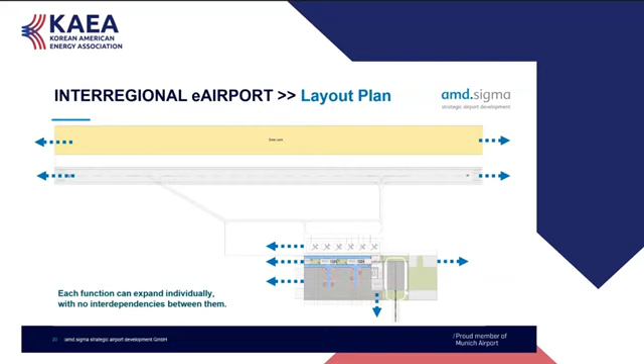And that's how it looks. You have a big solar park, a runway of about 1,000 meters, and on the bottom you see a terminal building that combines a vertiport and an airport. That's the first one that has ever been designed this way worldwide, so we're quite proud of it.

To the right, you have either an airport city or a cargo city, because we believe you can have passengers during the day and cargo during the night, and you get a much better business plan with that.

So that's pretty much how it could look, that's basically quite a lot. But you can start small. You can start with half of the terminal building for passengers, and also start with only very little for cargo, and just go piece by piece and let it grow.

So we have about 12 eVTOLs that feed the passengers from the big city into this airport, and we have 6 positions for electric planes that can be 9-seaters, 25-seaters, up to 40 seaters. That can host anything between 300,000 and 1 million passengers.

So for the last slides, there are a few impressions from the inside. Maybe next slide.

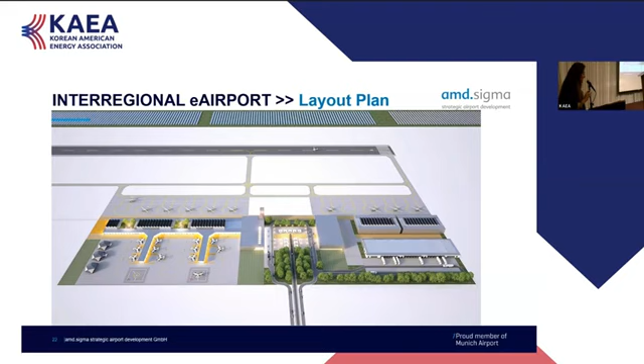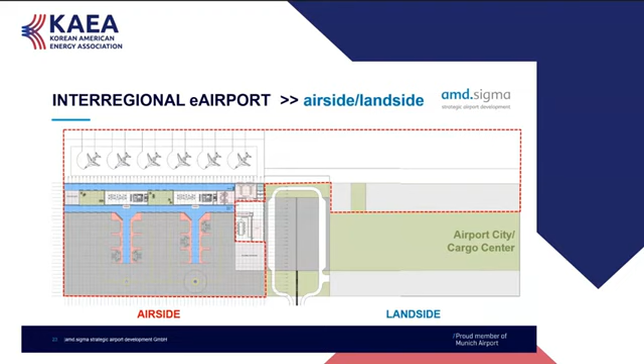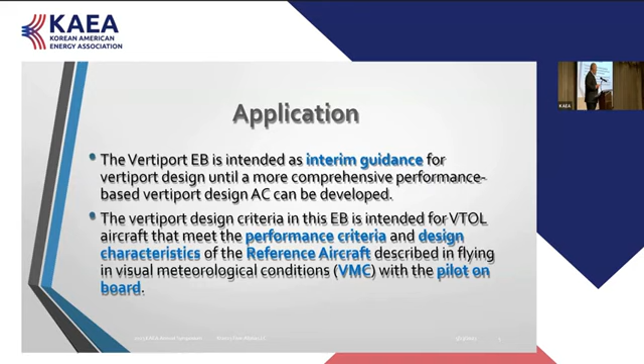Now, the FAA has said they're probably going to release an update to the engineering brief, maybe even this year, before the AC is published, because there are some things they didn't address that they want to.

Next slide, please. Now if we go into public versus private, this is one of the challenges in the United States. In the United States, we only have two categories for use case: public or private.

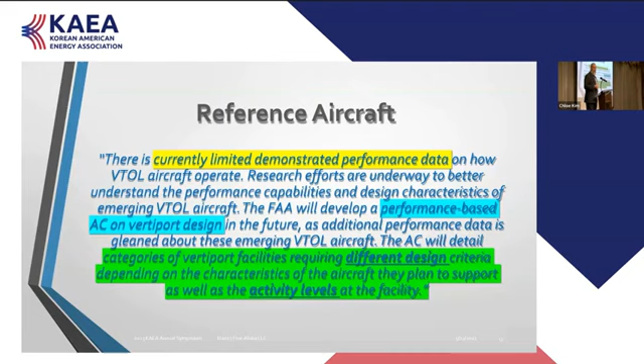Next slide, please. So these are just some of the things on the reference aircraft. You'll notice electric battery driven, using distributed electric propulsion, is the criteria: 12,500 pounds, maximum length and width 50 feet. Anything greater than this would not fall into this category of the reference aircraft—it would be something other than. Next slide.

Land-based, so we're not looking at anything that's off water, water-based, amphibious, or float operations in this current engineering brief. VFR pilot on board.

If you don't know what hover out of ground effect means, it's a performance classification for helicopters in the certification requirements under Part 27 and Part 29. When an aircraft, helicopter, or eVTOL is in close proximity to the ground, the airflow gets resistance, and as that resistance pushes back, it requires less performance from the aircraft to hover. Once the aircraft leaves that area, it gets into what we call out of ground effect. Rule of thumb for helicopters is 1.5 times rotor diameter, and you're into a higher performance requiring area for flight.

So that's one of the things we pointed to in the eVTOL: if you're landing with out of ground effect normal operations, it must be able to have that performance level. It's quantified as being able to take off vertically and land vertically. And then the downwash, outwash is something we're looking to measure because we're not sure what that is yet.

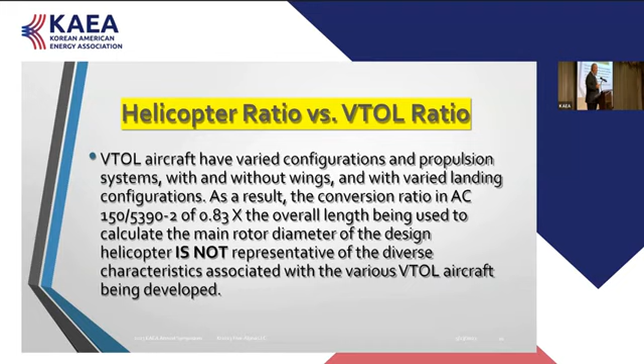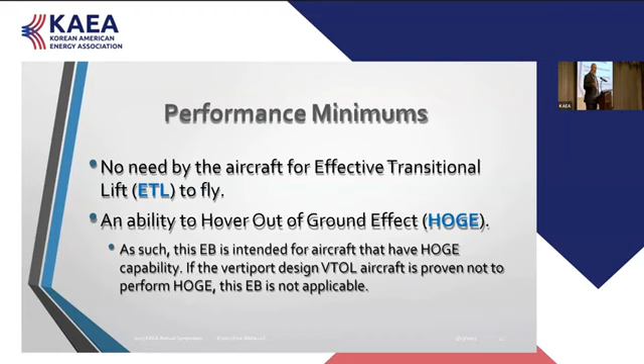Performance minimums, effective transitional lift, and hover out of ground effect are the two primaries they point to. This is a new acronym: controlling dimension. It basically equates to what we refer to in ICAO as D, or overall length. So this is now the new D. We used rotor diameter a lot in the past, but now it's controlling dimension.

Design and geometry. This is straight out of the book. This is a size that we're looking at today.

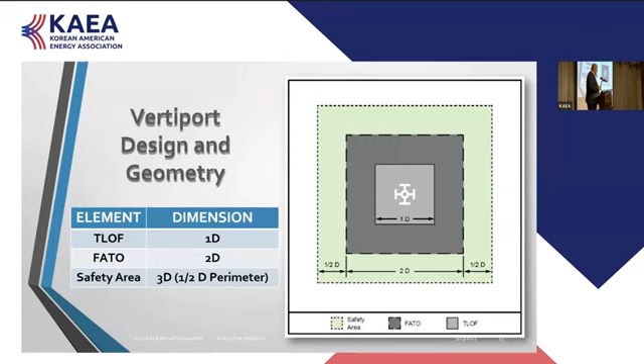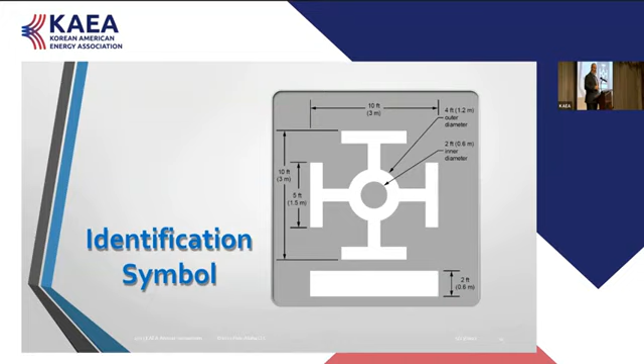This is the original identification from the 1990s for heliports. There's testing going on right now at the FAA Tech Center to identify if this is the right symbol for vertiports.

We talk about conversion, redesigning. That's a criteria in the engineering brief that speaks to that. Again, it's challenging to do that.

Charging electricity. One of the groups that wrote the section in the FAA engineering brief that I'd pay very close attention to, if you're not familiar with it, is called NREL, National Renewable Energy Laboratories. They're a government agency out of Denver, and they do a lot of work in the renewable energy world and have written some of the better white papers in this space for charging.

One of the things at airports, or even heliports, is what's the separation between aircraft. This is where we get into wake turbulence separation between lights and heavies. We don't know exactly yet what the eVTOLs will produce for wake turbulence.

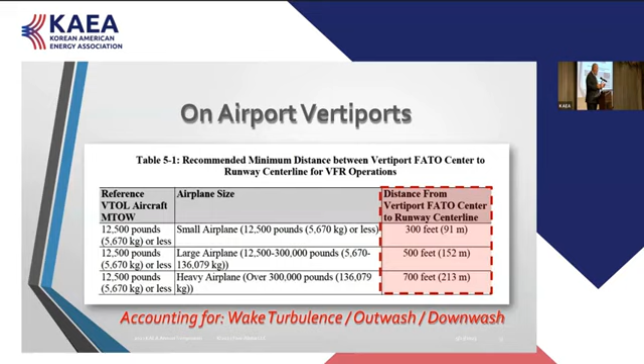Benefits of existing airports: existing clear airspace, access to the electrical grid, room to grow and expand, capacity for high throughput mass transit access points. Your average heliport doesn't have that.

Downwash, outwash - we're doing research on that right now. Working with Wolpert, we're getting ready to kick that off pretty soon.

Other standards: ASTM International has a Vertiport standard, published August 2022.

National Fire Protection Association - I'm the chair of NFPA 418, which is a heliport, now heliport-vertiport standard. We just finished our last go-around. Expect that to be published as early as December 2023, but as late as June 2024. That'll give fire standards for municipalities.

International Code Council - haven't seen anything from this group yet. They're the ones that design building code and fire code. We need to engage this group because municipalities lean on this for heliports, and will lean on it for vertiports.

New group out there I've worked with for the last couple of years, designing a standard for illumination: IES. This is not the landing area - this is the surrounding area, the parking area, the refueling area, the loading area for cargo and things like that. But the IES, it's an ANSI standard.

So we heard a lot today from our first two speakers about the need for data in order to inform standards, some harmonization of those standards internationally. We heard a little bit about opportunities and challenges of existing and new infrastructure, a complex governance landscape, and the need for that methodical planning process to get AAM off the ground.

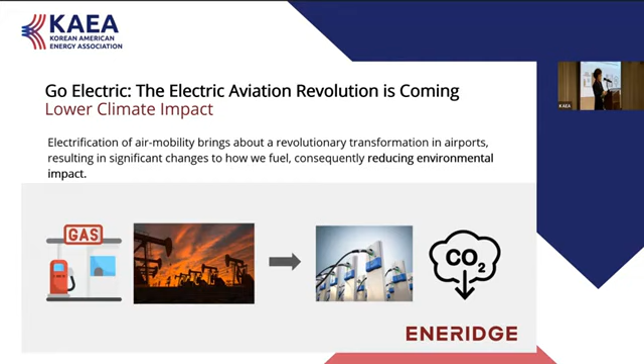When we electrify air mobility, charging infrastructure needs high power solutions. High power charging systems will enable quicker charging, reduce turnaround times, minimize ground time between flights, extend flight range, increase flight frequency, and improve overall operational efficiency.

So aviation charging has specific requirements. For ground vehicles, when you drive an electric vehicle, you can drive up close to the charger and start charging. But for aircraft, you cannot drive up to the charging station. Aircraft will land on a certain spot, and the charger should reach out to the aircraft with a moving wheel or extended cord. So movable chargers and extended cables should be introduced to aircraft charging.

But high power charging cables are too heavy to handle, so the thickness and weight is a hurdle, an obstacle to be taken care of.

When a ground vehicle drives up to a charging station, stops or bollards will block the vehicle in front of the station for safety measures. But in aviation charging, because of the aircraft's wingspan and rotor diameter, a low height charging station would be better to prevent any possible incident. So lower height chargers have a spatial advantage and reduce vertiport complexity.

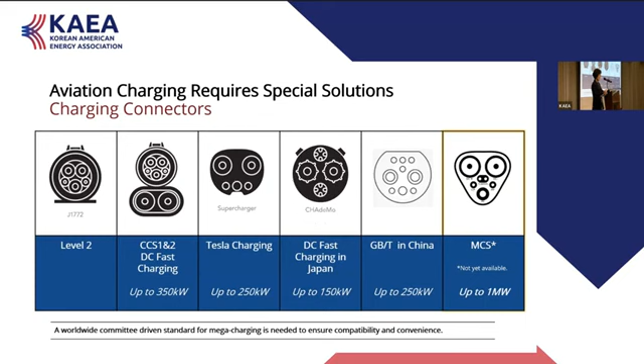Next generation aviation charging stations and vertiports require special operating systems and networks. Real-time weather monitoring is key. Wind gust, rain, lightning, snowfall, and other micro weather information should be monitored and reported to the aircraft and ground operators. Predictive capability coupled with monitoring can enable dynamic and safer route planning.

Next generation aviation requires an unmanned air traffic management system and a high-speed communication network. Aviation charging requires—next slide.

Aviation charging requires high-power infrastructure. Electric aircraft charging requires a huge power upgrade from the utility companies' grid power, and it will end up at high cost of operating expenses.

To reduce dependency on grid power and operating cost from the utility company, and to increase resiliency, we can build solar power, solar panels, and wind turbines, and install energy storage systems to reduce peak demand charge, and even build a small-sized power plant for continual power supply.

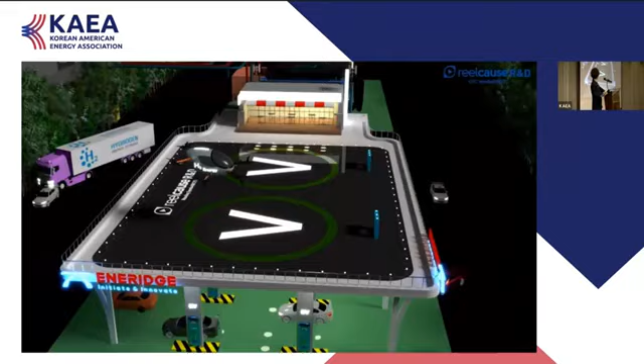The key components for charging stations are electric charging hardware, hydrogen refueling station, and operating event platform.

We will provide a DC fast charging station. Currently up to 350 kilowatt DC fast charging stations are available, but high power charging stations will be developed and available for airplane charging in the future. And we can provide a hydrogen power charging station.

One more important component is the Vertiport operating event platform. It should be 5G network connected and provide location of charging stations, charging status, real-time weather monitoring, telemetry information, charging management, battery status information, and it should be over-the-air software updated.

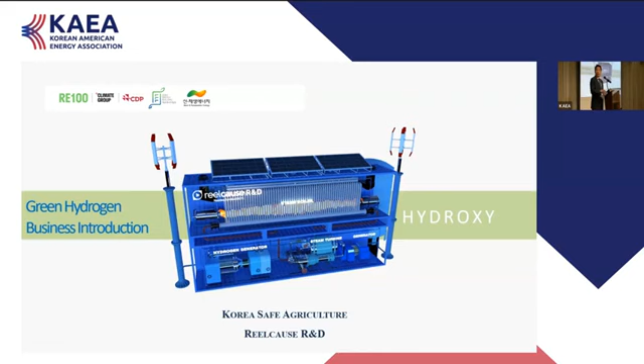So this is the model that you saw. This is where we provide either hydrogen or electricity, so that you can move forward with your projects. Let me explain our entire system in a nutshell.

We developed a low power water electrolysis system based on small wind power to generate HHO gas, known as brown gas, and further developed an HHO gas burner that generates and burns its own HHO gas through pyrolysis. I'm sure some of you know about pyrolysis. Through this process, we developed an eco-friendly power generation system without producing carbon dioxide or NOx.

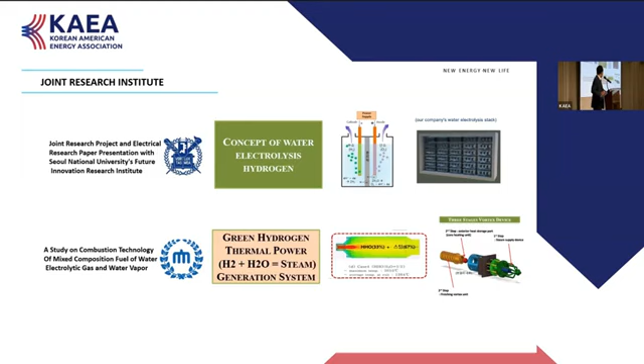Allow me to introduce our key technologies. Our generation system uses an industry-proven, typically used steam turbine generation system, which generally uses fossil fuels as its energy source. As you're aware, this popular system has been verified and used for over 100 years since the Industrial Revolution. The only difference is that our system fires up HHO brown gas as the fuel to generate steam at high heat. This is our green hydrogen cogeneration system.

Our key technologies are divided into 3 areas. First is a water electrolysis system, similar to the popular alkaline method. Our key technology that sets us apart from the alkaline method is that our system does not use highly expensive metals and KOH solutions in the process.

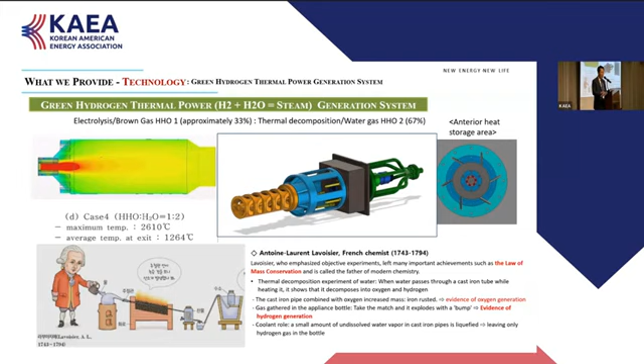Our water electrolysis system only uses water and stacks to produce HHO gas. Our stacks are made by proprietary new graphene compound materials. This is our patented and innovative technology in water electrolysis systems, jointly researched and co-developed with Seoul National University's Future Innovation Research Institute. Through this system, we were able to minimize required electricity down to 24 kilowatts per hour to produce 1 kilogram of hydrogen. On average right now, 1 kilogram of hydrogen is produced using 50 kilowatt hours.

This new water electrolysis system will allow us to mass produce HHO gas to reach our future goal, a best case scenario, to attain approximately 20 kilowatts per hour from the current 24 kilowatts per hour to produce 1 kilogram of hydrogen. In other words, we're improving our efficiency.

This is our second patented core technology. It's called the HHO burner system, which heats an anterior heat storage section located inside the boiler to generate additional HHO gas through pyrolysis using recycled steam supply. This technology is co-developed through joint collaboration with Chungnam National University.

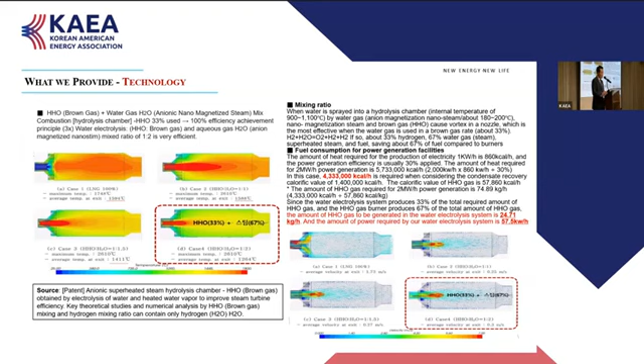Through our first water electrolysis system and additional HHO burner system, we're able to complete the third and final eco-friendly green energy generation system. With our innovative technologies, we can provide green hydrogen and green electricity to all of our partners to eliminate carbon footprints on our planet. Thank you.

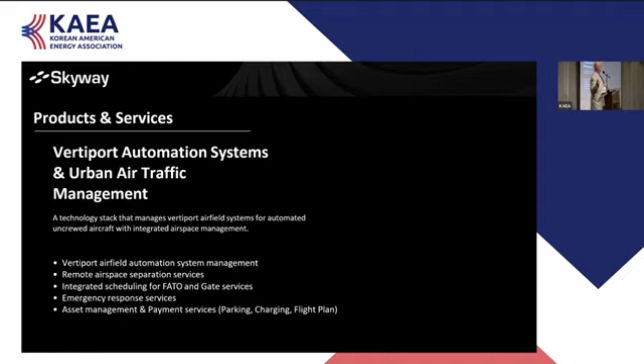We are going to be fully integrated with emergency services, so we're never holding up a police or fire search and rescue operation because somebody ordered Starbucks coffee to be delivered to their home.

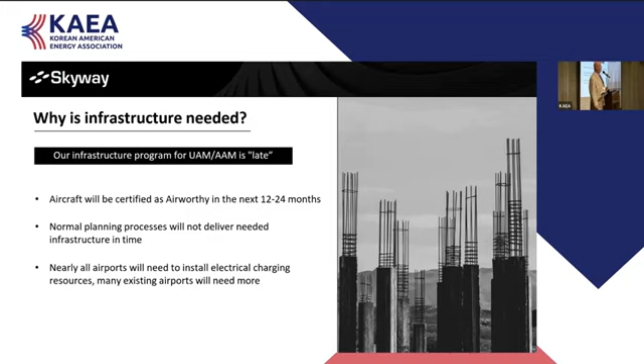I think I'm going to just very briefly talk about this. We all understand why infrastructure is needed. We are behind schedule for developing the infrastructure we need so that when these aircraft are certified and ready to operate, we have all of the facilities ready for them.

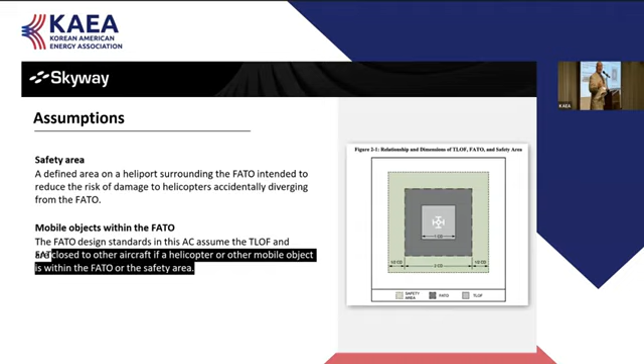The only thing important here is that when there is an aircraft within that safety area that is on that FATO, having just landed or about to take off, there can only be one. That also affects the capacity. You can't have another aircraft hovering in to land on a FATO while another vehicle is already landed on that FATO. That's one of the assumptions I needed for developing the capacity analysis for these vertiports.

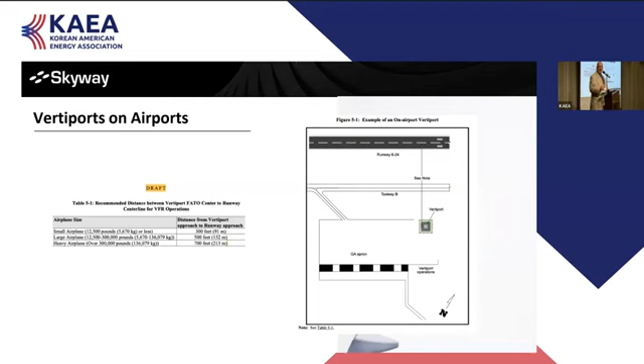Will vertiports be on the same campus as your airports? I just talked about this—yes, they are. Here's how we know: if you go to AAMrealityindex.com, which is on the bottom of my slide, you'll see that United Airlines has already ordered or pre-ordered 700 of these aircraft—700 aircraft for one airline alone from two makers. Maybe it's coincidence, but United also has 7 hubs in the United States.

I assume they're going to take 100 aircraft at a time and put them into one of their hub markets. So don't expect your vertiports necessarily to start with 5 aircraft and grow from there—some are going to start with 100 aircraft on day one, because that's what you need to develop this business. If you're starting a cab company, you don't start with 1 cab because you're never going to be reliable—you start with 50 cabs, and the same will be true of this type of service.

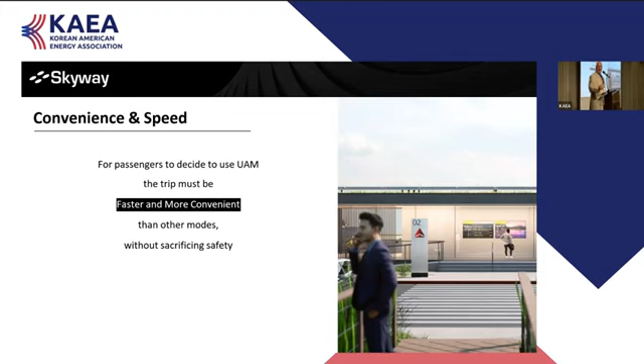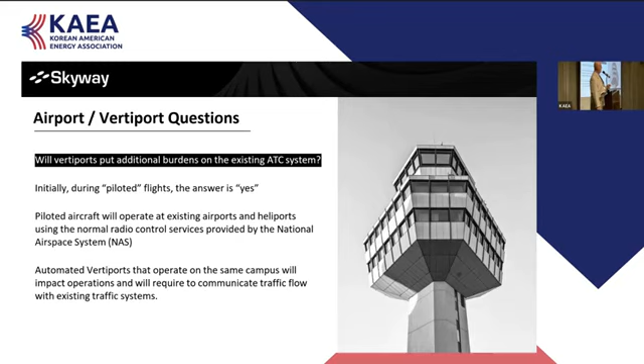Will this put extra work on the existing air traffic control system? The answer is yes, certainly at first. These vehicles are going to be piloted, so there will be controllers talking to pilots, and they'll be taking off on normal runways. Eventually, however, the system's going to be fully automated, so you'd assume no.

But the answer is yes. Sorry, I think we may have skipped one.

Even when they're fully autonomous and operating on an existing airport, the vertiport and the airport have to operate in the same direction. So somewhere there's going to be a controller, whether he's just flipping a switch or calling down to the vertiport operator, there is going to be some coordination. So that will always be true.

Now we're going to talk a little bit about use cases, first and last mile delivery of passengers. I've already mentioned United Airlines buying 700 of these aircraft. This is what they're going to use them for. They're going to fly you into a major airport on an existing legacy jet, and then you're going to get off and want to get on an urban air mobility vehicle to finish your trip. Maybe you're going home, maybe you're going to Disney World, maybe you're going to the Super Bowl, whatever that is. That first and last mile delivery of passengers is a major use case.

I think it's going to be one of the first early adopters because the airlines have invested so much money in this. From a planning perspective, this is interesting, unique, important, because the flight schedule for the urban air mobility vehicles is going to be very similar to the flight schedule for the airline operating that service. It's important to keep that in mind because we need to forecast these operations in the future. For example, if you took 1% of all United Airlines origin and destination passengers at O'Hare Airport, you would generate 300 flights per day on these smaller vehicles. It's important to keep that in mind.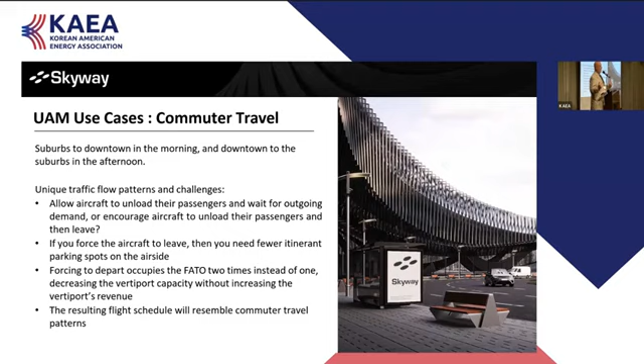You might double your landing fees because you're going to make that aircraft come back, but I don't think that's really worth it. It doesn't help your level of service. The commuter travel flight pattern is going to look just like commuters - everybody going downtown in the morning and leaving in the afternoon.

The random or point-to-point use case is hard to plan for. It's not a big demand type. It's just going to be, my wife is going to take the vertiport in my neighborhood and she's going to fly to the mall or go to dinner somewhere on the other side of town. You can't predict it. You just put in a bunch of flights that are random between those vertiports and do the best you can.

Itinerant operations at vertiports don't get a lot of discussion. These vehicles aren't just going to be efficient for airlines to operate, they're going to be efficient compared to other general aviation aircraft. People will start buying these electric vehicles instead of a Cessna 310 or Cessna 172, and it's going to eat into your fleet mix as they replace older types of vehicles.

So you want to make sure you're able to store and maintain those aircraft. It also gives you a very different type of operation than before. These vehicles might do more trips, more frequently, with shorter durations, and you need to plan for that.

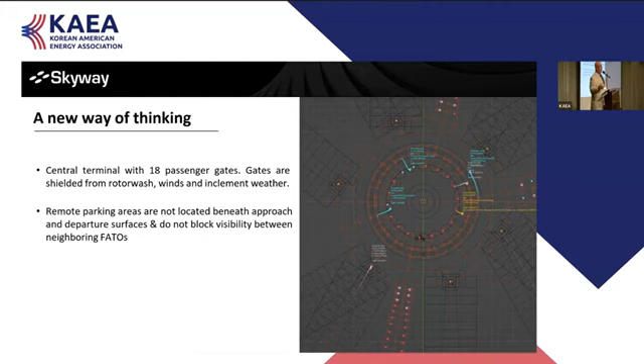Next slide. This is what it looks like when you lay out a vertiport with a terminal in the center to minimize taxi times. Gates are wide on the airfield side because the aircraft comes in and turns, and halfway through the turn it unloads and loads passengers. If you simply pull up facing the terminal, you'd have to back out or have the aircraft tugged, and we're trying to avoid all that manpower. So it's wide on the air side, narrowing toward the land side, since the gate doesn't need to be very large. The aircraft only holds four people, so even holding the next three flights' worth of people, we're still talking fewer than twenty people total.

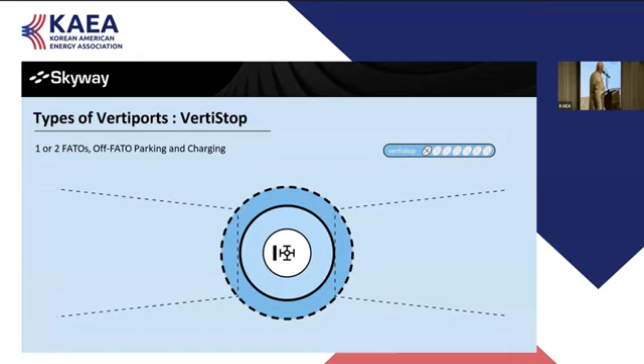Next slide. I'm going to skip through a lot of these, so let's just go, and I'll show you when to stop.

Right here, this is the Vertistop, which we talked about earlier. This is the smallest possible vertiport. But how big is it? I'm showing it at 3.1 acres if you put a fence line around the entire area, what used to be called the heliport protection zone, which isn't in the engineering brief now but maybe will be. It's basically an area large enough that if a kid sitting at the end of that fence line threw a basketball fifty feet in the air, it would still be above the aircraft.

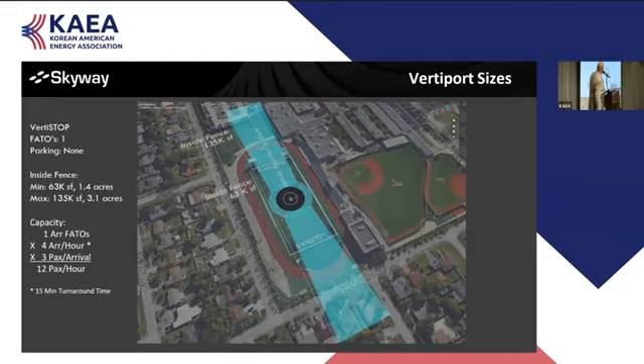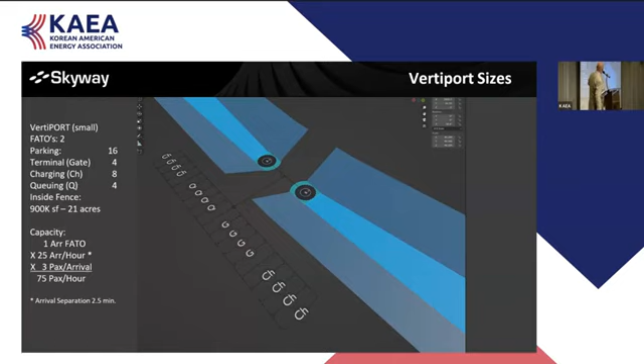Let's run through to the next one and keep going. This is just showing that I need more gates. One more—if I include the airspace surfaces, that's what that looks like. This is now 21 acres, almost 1 million square feet. This is only 2 FATOs, 1 arrival, 1 departure. Now let's go to 4 FATOs, 2 arrivals, 2 departures.

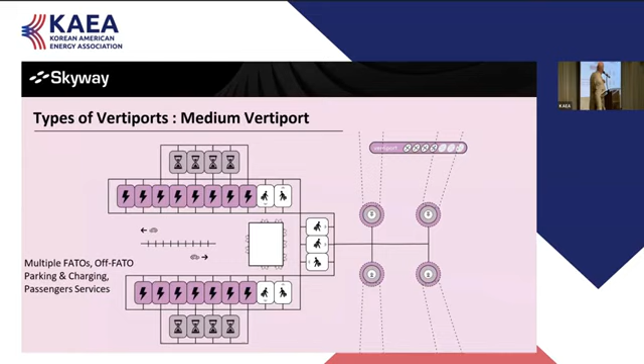Now I've introduced the terminal building. Everything smaller than this, I didn't necessarily need the terminal building. Now I do, because I've got 7 passenger gates alone. And I had 15 charging spots, 8 queuing, 44 acres for a 4 FATO vertiport.

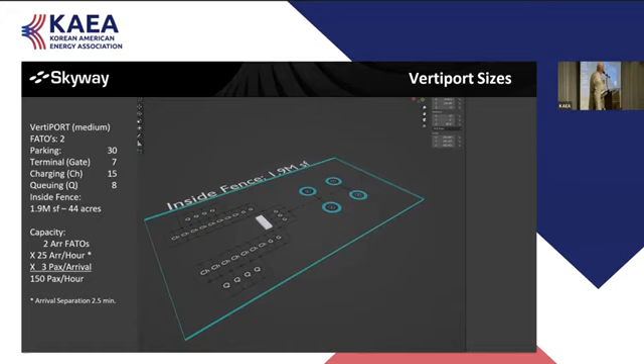Next one, last one we talked about—go ahead and skip through these couple of slides. We can move through these surfaces. Next one, we're going to go to the biggest possible, what we talked about earlier as a vertihub. Here's that centrally located terminal, 7 FATOs around it, 4 for arrivals, 3 for departures, because we think it's going to take longer to land than it is to take off. I think we'll get to the total acreage—we're up to 87 acres. So keep that in mind when you're planning these vertiports at your airports.

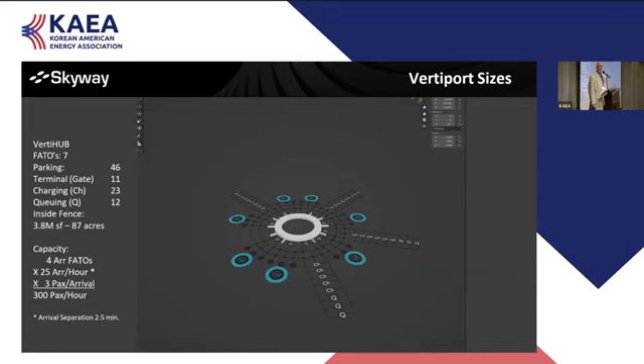One more, I think we'll finish us off. Keep going through these. And one more.

Finally, a Vertipark. Vertipark is a special type of vertiport, not meant for passengers at all—this is a vertiport meant just for the aircraft. If you Google the word vertiport and look at the artist renderings, you never see enough parking. You certainly never see 200 parking spots, but that's what you're going to be bringing into your community. So if your vertiports aren't big enough to hold the parking overnight in storage, by putting in a Vertipark in your community, you can have them all charged in one location overnight. The charging will be less expensive because you're delivering the electricity in bulk, and you're also doing it at night. And ideally, if your airport has enough space for solar panels, you can minimize that cost as well. As you can see, it's a pretty large space relative to the FATOs, which are each 300 feet apart.

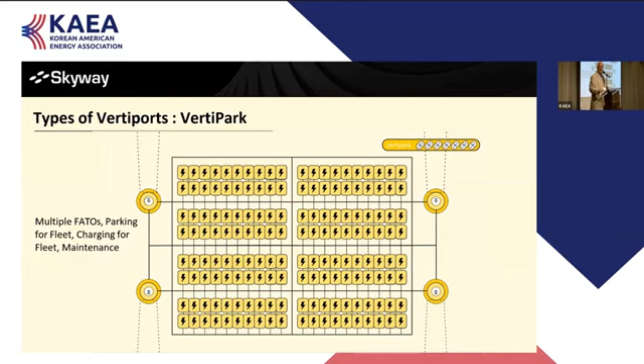Next one, and that's it. Does anybody have any questions? I hope I was able to catch up on our time a little bit.

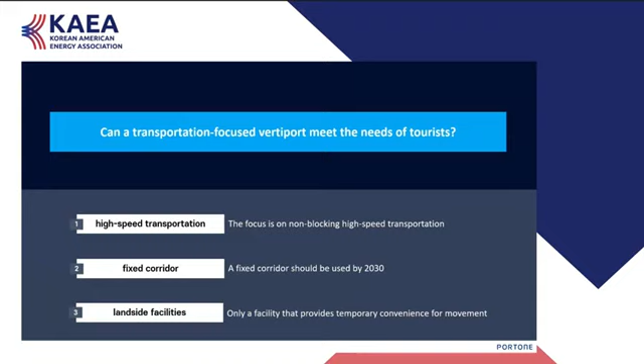However, the currently discussed concept of vertiport cannot meet the needs of tourists. Tourists in tourist destinations simply want quick transportation. A fixed corridor should be used by 2030 in Korea. Is it possible to do sightseeing in a fixed corridor? The land side of many of the currently proposed vertiport prototypes mainly considers only facilities that provide temporary convenience for movement. That's a problem.

In this situation, T-port may be an alternative. T-port is a vertiport built in a tourist destination. Let's see how T-port is different from other vertiports. T-port has a difference in vertiport operation. Tourists demand a moderate speed aircraft that can enjoy sightseeing as well as move quickly. In addition, T-port needs an aircraft that can carry many customers. Therefore, T-port must be a space where eVTOL and eSTOL are operated together.

Next, T-port has a difference in corridor and airspace. According to the KUAM plan, a dynamic corridor network will be applied after 2030. However, it is necessary to consider a dynamic corridor network within tourist destinations where T-port is located. T-port should play a role in airspace control of the entire tourist destination, not just around the vertiport.

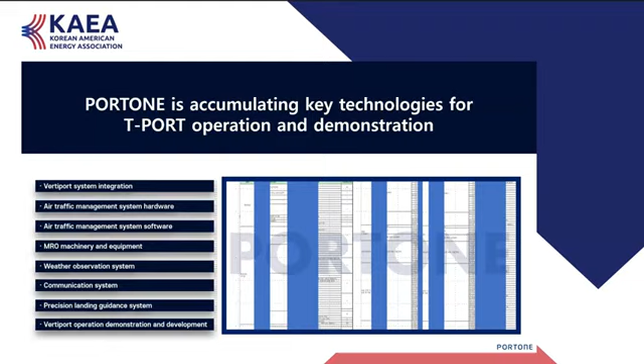Now, PORTONE plans to build 15 to 20 vertiports across the country by 2028. These vertiports would include both vertiport and T-port. Apart from this, we are discussing the vertiport project with local governments from the perspective of creating a future industry.

We also aim to be one of the top 10 vertiport companies globally by 2030. To do so, we will work on making a standard vertiport in 2025, along with securing the operating area of vertiport in 2023. And in 2027, we plan to expand overseas.

To achieve this goal, we have a team of 3 C-level directors and an external advisory board consisting of 8 members with diverse expertise and perspectives. Although PORTONE is currently a small vertiport startup in Korea, we have a big dream of Skyway and being the first company in the world to achieve this.

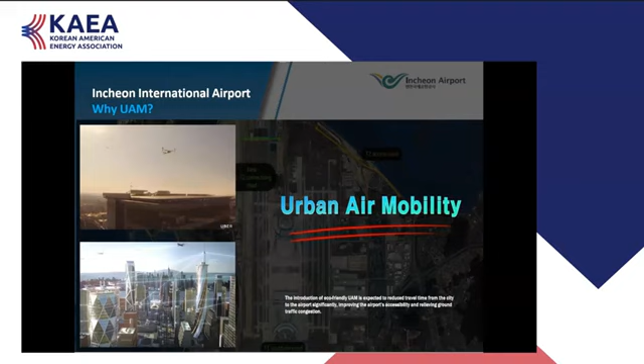To address this challenge, we see urban air mobility, UAM, and eVTOLs as potential solutions. The UAM airport shuttle can significantly reduce travel time and improve accessibility while relieving ground traffic congestion.

Now, let's move on to the current stage of Incheon Airport's UAM initiatives. In June 2020, the Korean government announced the UAM roadmap aiming to commercialize UAM in South Korea by 2025. As a member of UAM Team Korea, Incheon Airport collaborates with the government, industry, and academia to develop policies and achieve successful national commercialization.

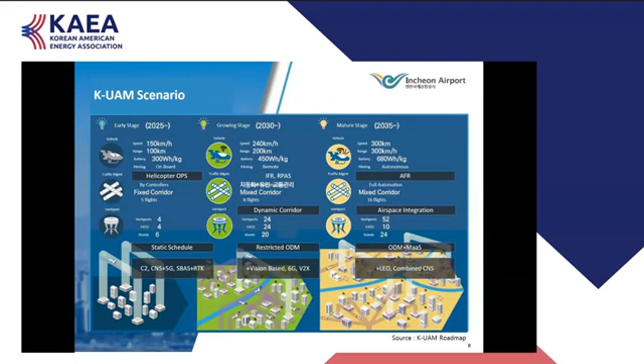Let me provide a brief explanation of Incheon Airport's vertiport infrastructure and UTM plans. Regarding vertiport infrastructure, the facilities will be expanded over time, progressing from verti-stops to vertiports and ultimately to verti-hubs. Initially, the plan is to start with verti-stops located on the current helipads or airport outskirts, ensuring safety and minimal interference with conventional aircraft. As time progresses, the aim is to construct advanced facilities like vertiports and verti-hubs near the passenger terminals, enhancing convenience for passengers.

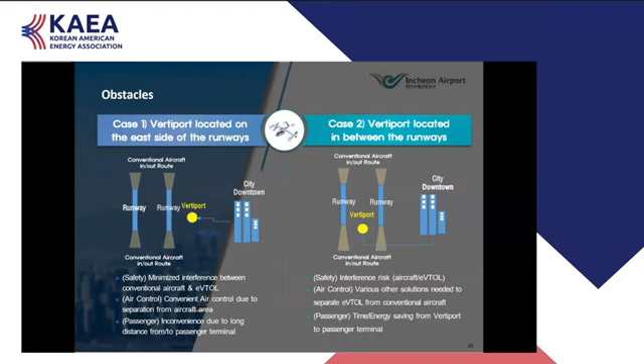Moving on to the next page, it's important to note that the remaining pages related to Incheon Airport's vertiport location and facility plan are potential plans that are not yet finalized, decided, or official. These are just brainstorming ideas under consideration. Therefore, I kindly request that you treat this information as a confidential brainstorming concept and refrain from sharing it as an official release. Considering the early stage of the industry starting from 2025, the focus is on minimizing safety risks as discussed earlier.

Given the need for careful consideration of safety, the initial locations being considered are situated on the east side of the runways, near the cargo terminals and Logis Park. These locations provide a balance between safety considerations and operational efficiency at this early stage.

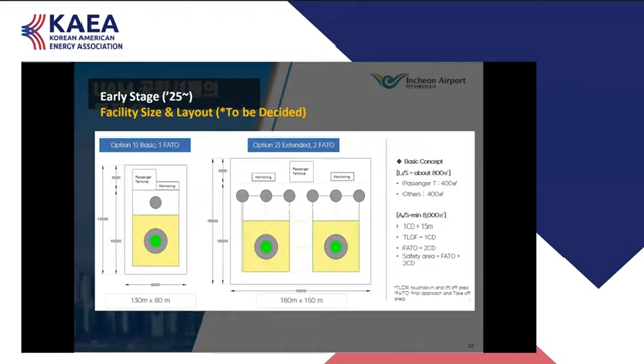Next page. The vertiport facility in the early stage would consist of takeoff and landing sites, small passenger facilities, and a monitoring system. Next page.

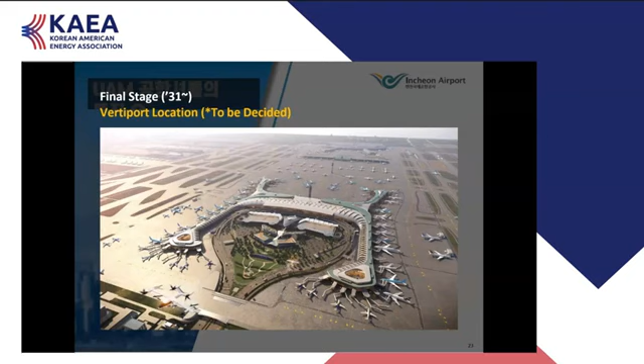In the future, once the UAM industry matures and advanced technology has addressed safety concerns, the goal is to have vertiports located at the passenger terminals, enhancing convenience for passengers. This concept design presents the integration of a vertiport within the fully constructed passenger terminal 2 of Incheon Airport. Next page.

The concept design for the Terminal 2 vertiport proposes locating the facility above the short-term parking lot directly in front of the terminal. However, it is crucial to emphasize that safety and technological challenges must be resolved first.

While final decisions on vertiport location and infrastructure are not yet determined, Incheon Airport is preparing for UAM operations, including implementing a helicopter airport shuttle service.

Given the current challenges in UAM operations, a viable alternative is to utilize helicopters. By starting with VTOL aircraft, such as helicopters, and transitioning to eVTOLs once they are commercially available, the groundwork for UAM services can be established.

Collaborating with a company named Moviation, Incheon Airport is working to establish UAM services and infrastructure for existing VTOL aircraft.

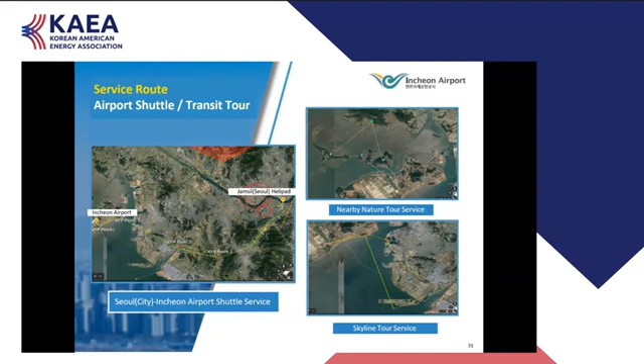The construction of the passenger facility is underway, and a partial service launch is anticipated in the second half of the year.

Okay, this concludes the presentation. Thank you for your attention.

Thank you so much, incredible presentation. I've had the privilege of being able to spend some time at Incheon. This is very exciting. So we were able to get our other speaker. I'd like to introduce Min-chul Chung, the UAM team leader at Korea Airports Corporation, particularly focused on ground-based infrastructure for urban air mobility. So Min-chul, do we have you on the line? And can I go ahead and pass it over to you?

Yes, hello, can you hear me? Yep, we hear you loud and clear. Thank you. I'm sorry about the technical problems previously. I actually joined it from the beginning page, but I realized that I participated as participant, not speaker, so I reconnected to this room. Sorry. Actually, my name is Hyung-gyu, and I'm deputy director of the UAM office in Korea Airports Corporation, and Min-chul Chung is sitting next to me because he had to go to an urgent meeting soon. So I will do the presentation this time.

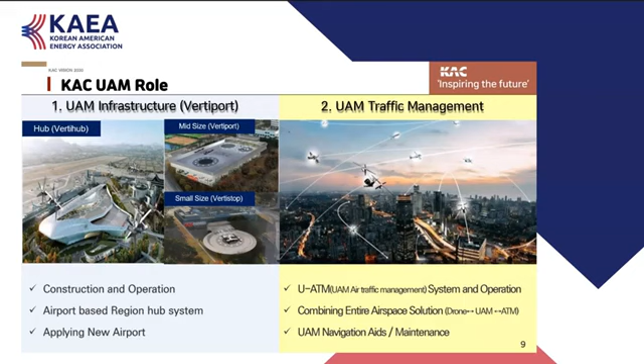Like everybody knows, UAM arose to solve urbanization and traffic problems inside the city. But can UAM actually solve urbanization and traffic issues?

Is it possible to realize the movie of The Fifth Element? Every media introduced UAM as air taxi and fully automated flying cars. The public thinks UAM will operate like this.

But there are hundreds of hurdles for a fully automated UAM. We have to consider economy and selection factors, and also legal and regulations, etc. I'll talk about the hurdles for infrastructure in the next slide.

So let's think about this. UAM is not a fully automated flying car, but it can operate as an electric VTOL aircraft, like electric helicopters. This will be possible in the near future.

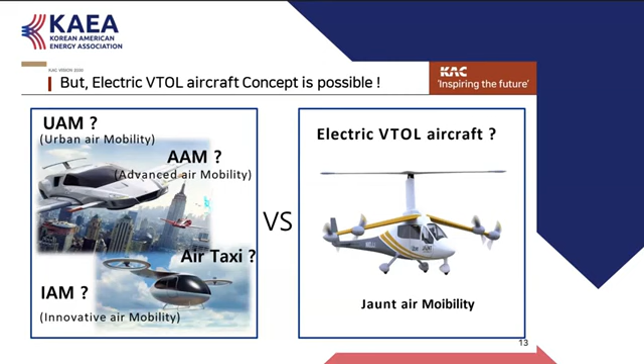For the initial phase, Korea Airports Corporation is preparing UAM for regional air mobility. UAM will be an effective way for regional transportation, since the transportation system is already very well developed in the Seoul metropolitan area. In the initial phase, the ticket price will be comparatively high versus other transportation modes, so regional transportation will be the most effective way to apply it in South Korea.

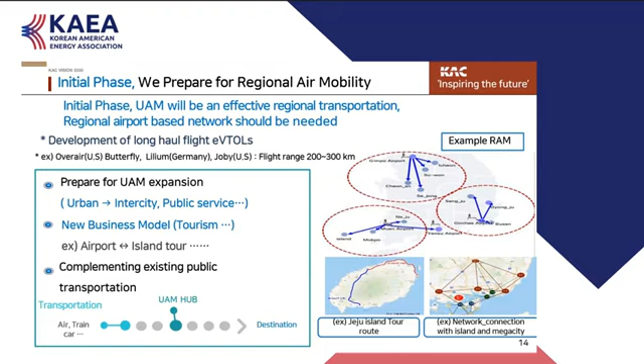We also think airport-based RAM service can be a complementary airport access transportation, and it can create new point-to-point tourism demand in the future. As I introduced in the previous slide, we are now designing and preparing new airports, and we're going to construct vertiports at all the new airports.

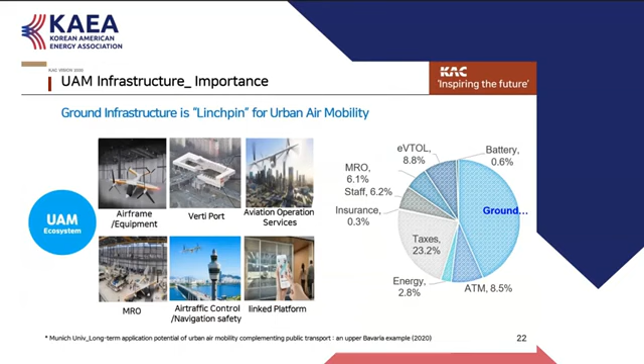We are now preparing Vertiport operations in South Korea, and we found there are many hurdles to construct and operate a Vertiport. We have to select the land and location, consider surrounding area obstacles, supply a large amount of charging facilities, consider urban planning, and cooperate with local governments.

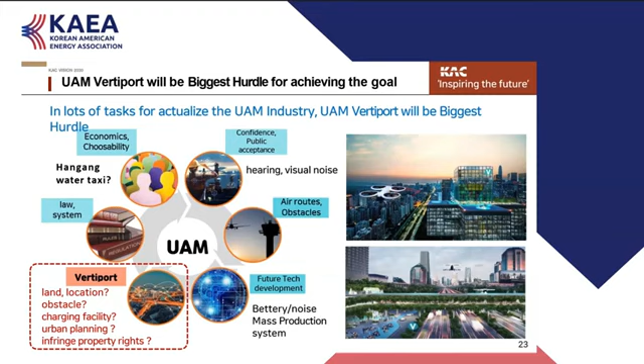We also have to consider whether the Vertiport can infringe property rights, because when we build it, there will be an obstacle clearance surface nearby. Buildings next to the Vertiport cannot build high, so they could sue the Vertiport operators. We think this is the most important factor to consider when operating a Vertiport.

Vertiports have to converge all transportation, so they have to consider connections with other transportation modes, including future ones.

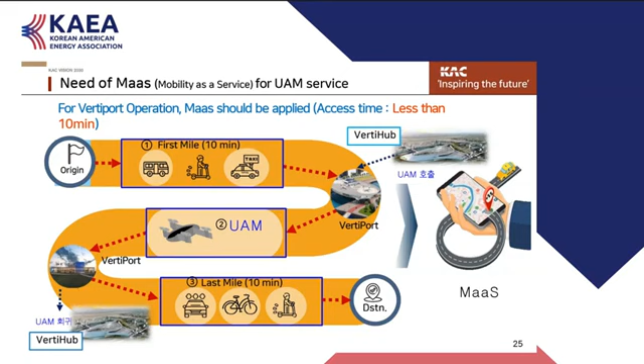The MaaS service is also critical for UAM operations. Everybody knows about this slide, so let me skip it as well.

These Vertiports, as mass stations, will be core future traffic infrastructure in the city. We are also considering new hometowns in South Korea, not only the current urban core areas.

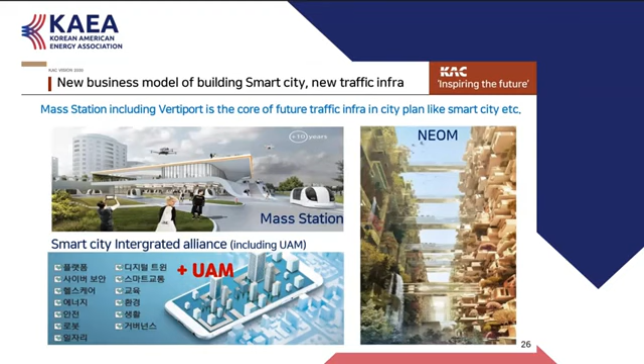We think a hub similar to the hub-and-spoke model in legacy aviation will also affect the UAM industry, because it's really hard to secure land in urban core areas, but we need large land to park for overnight eVTOLs, MRO, and charging stations. So we think we have to centralize all these functions into the Vertihub, letting the smaller stops reduce their burden, and they can be constructed depending on size, land availability, demand, etc.

We also set levels for the Vertiports. The biggest one is hub, mid-size is port, and the smallest is stop.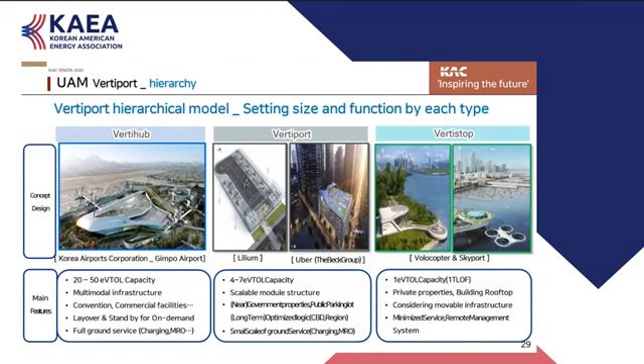I'm really glad to introduce our project. We are now preparing the Gimpo Vertihub in front of Gimpo Airport's domestic terminal.

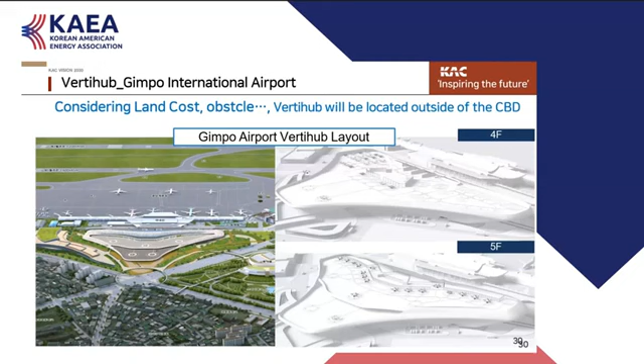And this will be the mobility hub in Seoul. It will combine all the transportation modes, including 5 subway lines, S-BRT, taxis, express bus, etc.

It consists of 3 blocks. Block A will be the mobility hub, like I explained in the last slide. It also includes block B and C. Block B will be the aviation cluster, and block C will be the innovative mobility cluster, so that we can combine all of the stakeholders to make synergy.

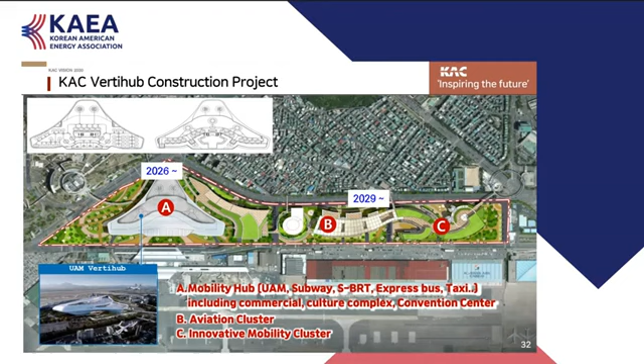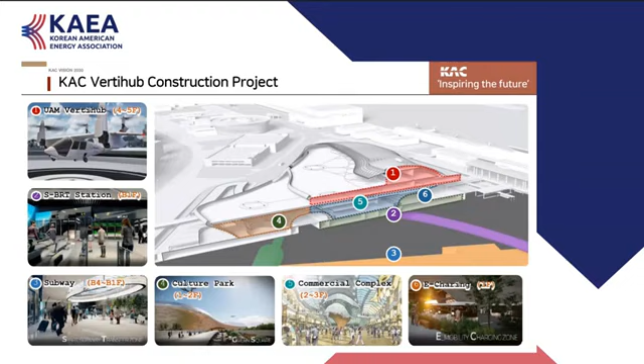Let's focus on block A, which is the mobility hub. We will use the rooftop for the Vertiport and Vertihub, and from the underground, it will combine S-BRT and the 5 subway lines. This building will also have a cultural park, commercial complex, and e-charging zone.

And this is not just a picture. We are now undergoing the preliminary government feasibility study, and next month we will get the result from the government.

Let me explain how we think about selecting the Vertiport and stop site. For phase 1, we need to determine the UAM Vertiport quantity in the city, and for this we have to consider the UAM demand and government policy.

Next, phase 2, we need to select the UAM service area. In this space, we have to consider conversion demand and other factors like geographical and demographical things, as well as public purpose, complementary means of transportation, and induced demand.

And the last, phase 3, we can select the Vertiport location within the UAM service area. In this space, we have to consider economic factors, technical factors, and social factors.

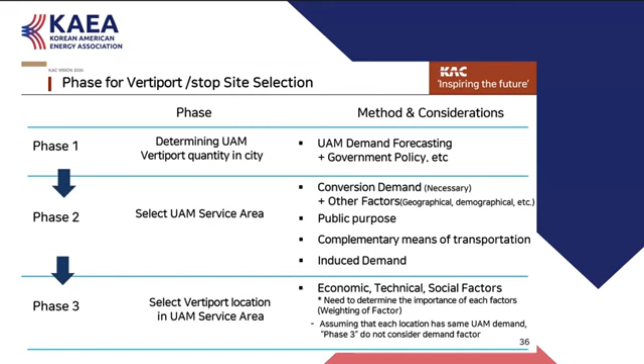For the initial Vertiport and stop, we start from public land because it is really easy to secure land by negotiating with the local government. We are now cooperating with our local government, but in the end it can expand to various locations like intersections, rooftops, urban streams, highways, etc.

Can I stop my presentation here, because next is a description of the UAM system. So thank you for listening to my presentation. Thank you for your listening.